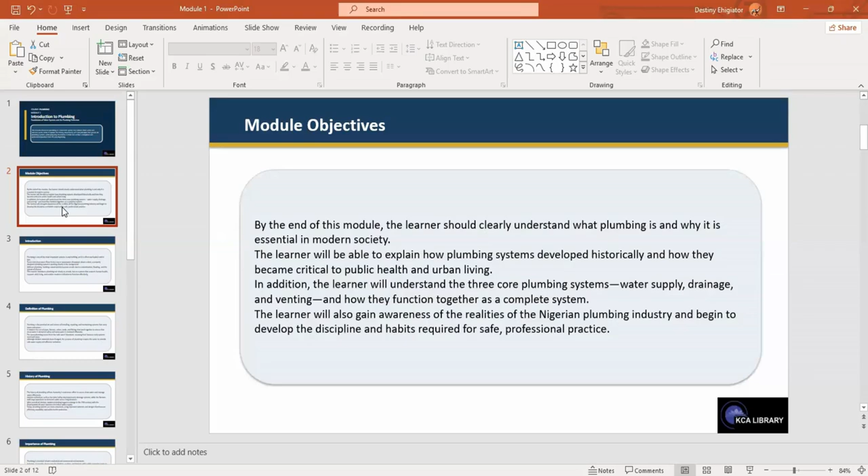By way of introduction, plumbing is one of the most important systems in any building, yet it is often overlooked until it fails. Every time clean water flows from a tap or wastewater disappears down a drain, a properly designed plumbing system is working silently in the background. Without plumbing, buildings would quickly become unsafe due to contamination, flooding, and spread of disease. This module introduces plumbing not simply as a trade, but as a system that protects human health, supports daily living, and enables modern civilization to function effectively.

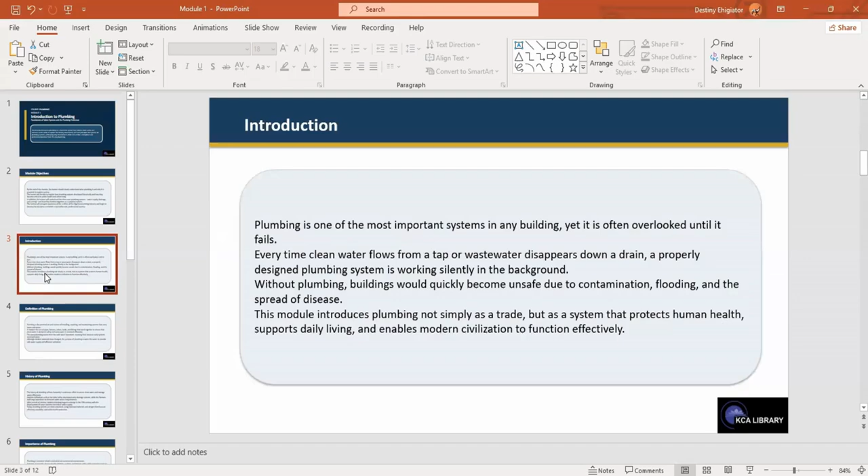Now let's look at the definition of plumbing. Plumbing is the practical art and science of installing, repairing, and maintaining systems that carry water and waste. It involves the use of pipes, fixtures, valves, tanks, and fittings that work together to ensure that clean water is delivered safely and wastewater is removed efficiently. The word plumbing comes from the Latin word plumbum, meaning lead, because early systems used lead pipes. Although modern materials have changed, the purpose of plumbing remains the same, which is to provide safe water supplies and effective sanitation.

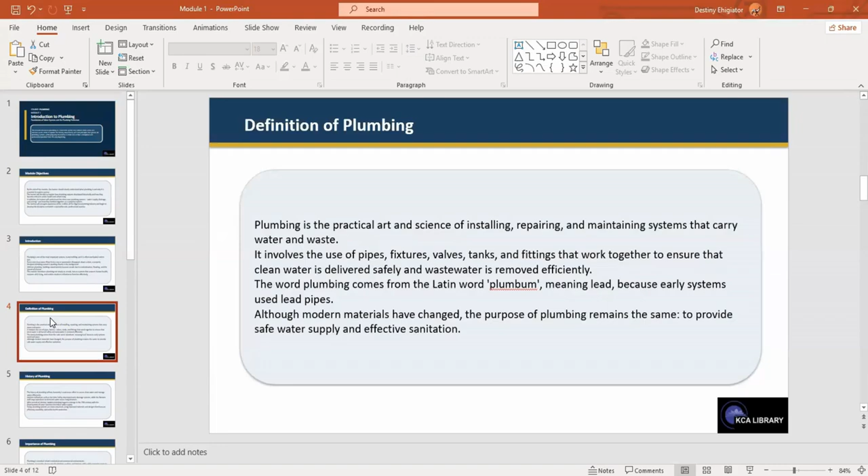Let's look at the history of plumbing. The history of plumbing reflects humanity's continuous efforts to access clean water and manage waste effectively. Ancient civilizations such as the Indus Valley developed early drainage systems, while the Romans built large aqueducts to transport water across long distances. After periods of decline, modern plumbing began to emerge in the 19th century with the development of sewer systems and indoor water supply. Today, plumbing systems are more advanced, using improved materials and designs that focus on efficiency, durability, and public health protection.

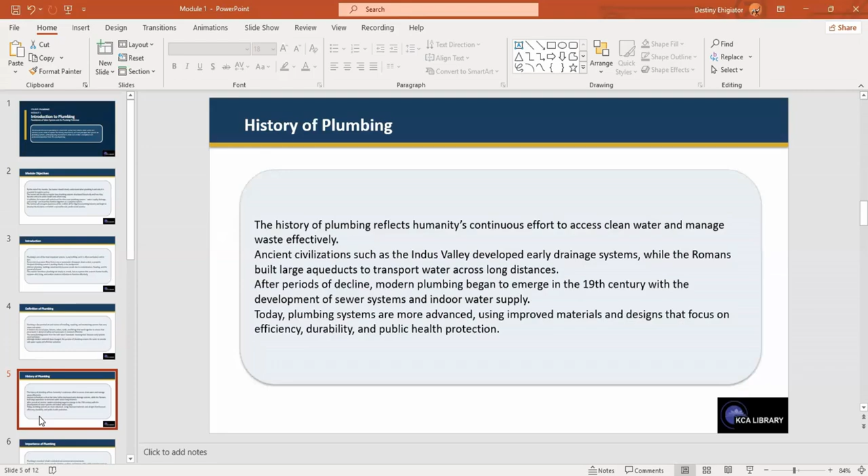Let's look at the importance of plumbing. Why is plumbing important? Plumbing is essential in both residential and commercial environments. In homes, it provides clean water for drinking, cooking, and hygiene, while safely removing waste to prevent disease. In commercial buildings such as hospitals, hotels, and factories, plumbing systems are more complex and critical to operations. A failure in plumbing can lead to contamination, structural damage, and significant economic loss, making it one of the most important building systems.

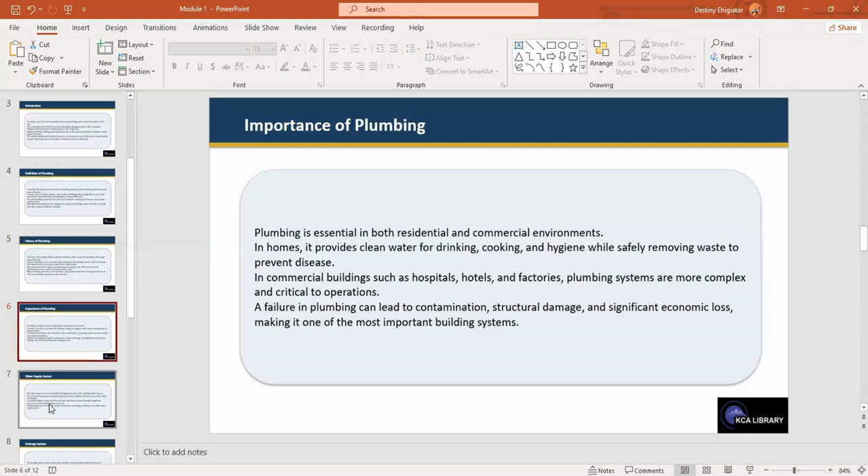Let's look at a very important term, the water supply system, one of the three core plumbing systems. The water supply system is responsible for bringing clean water into a building under pressure. This pressure allows water to travel through pipes and reach different fixtures such as sinks, toilets, and showers. A properly designed supply system ensures that water flows consistently without significant pressure loss when multiple fixtures are in use. Understanding pressure and pipe sizing is essential for maintaining an efficient and reliable water supply system.

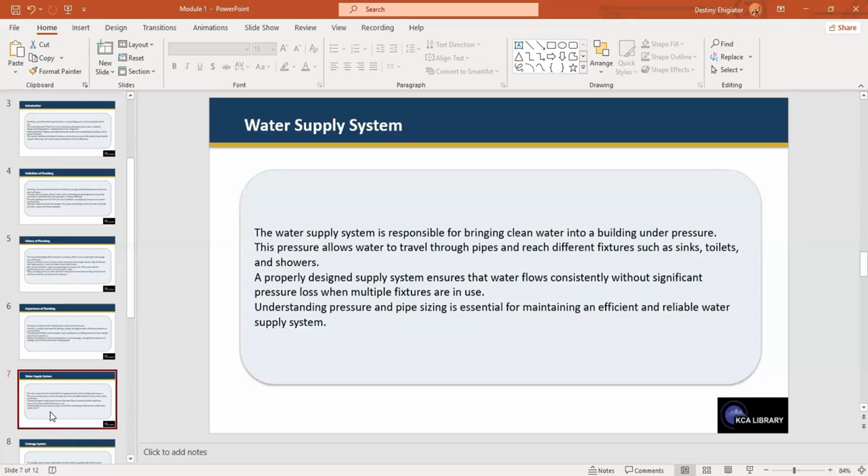Let's look at the next, which is the drainage system. The drainage system removes wastewater and relies entirely on gravity rather than pressure. The pipes are installed at a slope to allow water and waste to flow naturally towards the sewer or the septic system. Each fixture includes traps that hold water and prevent sewer gases from entering the building. Proper drainage design ensures that waste is carried quickly without blockages or backflow problems.

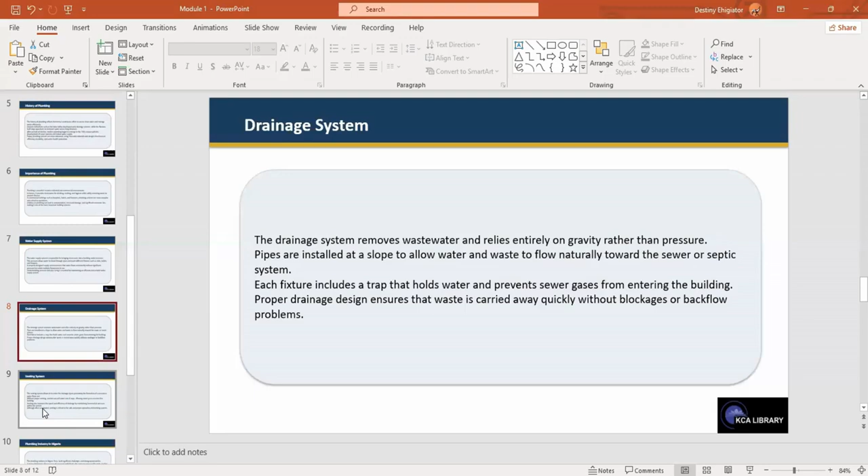The venting system is the next. The venting system allows air to enter the drainage pipe, preventing the formation of a vacuum as the water flows out. Without proper venting, suction pulls water out of traps, allowing sewer gases to enter into the building. So you see why the venting system is important. Venting also improves the speed and efficiency of drainage by maintaining balanced air pressure within the system. Although often overlooked, venting is critical to the safe and proper operation of plumbing systems.

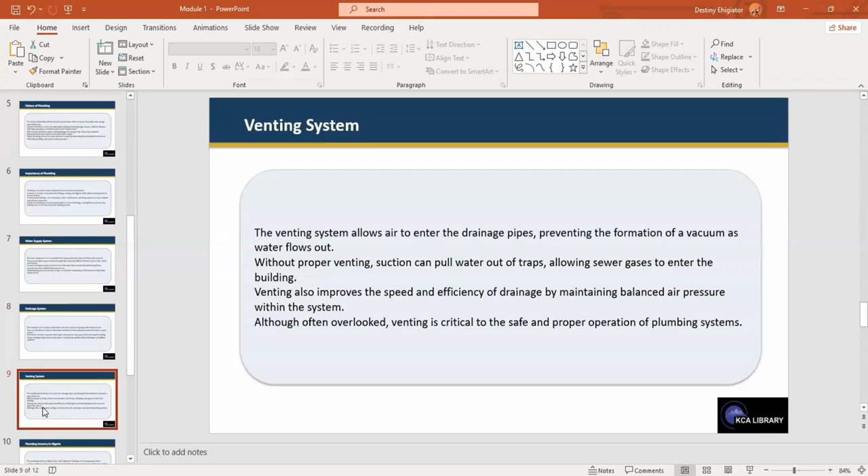How is the plumbing industry in Nigeria? The plumbing industry in Nigeria faces significant challenges and strong opportunities. A major challenge here is the presence of untrained individuals who carry out poor quality work, leading to repeated failures and safety risks. However, rapid urbanization and population growth have created a high demand for skilled and knowledgeable plumbers. Those who invest in proper training and maintain professional standards can build successful and respected careers in this growing field.

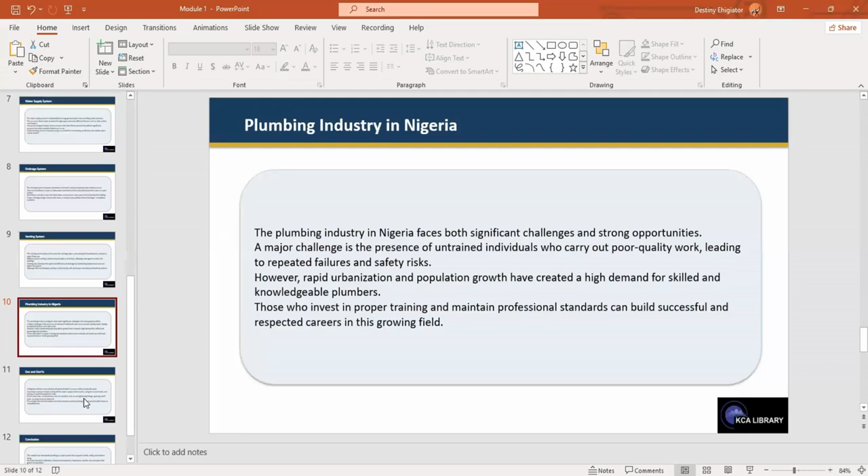What are some of the do's and don'ts in plumbing? A plumber must develop disciplined habits to ensure safety and quality work. Some of the important practices, which are the do's, include turning off the water supply before you repair, using the correct tools, and testing all work thoroughly for leaks. At the same time, certain actions must be avoided, which are the don'ts, such as over-tightening fittings, ignoring small leaks, or using incorrect materials. These habits form the foundations of professionalism and help to distinguish a trained plumber from an unqualified one.

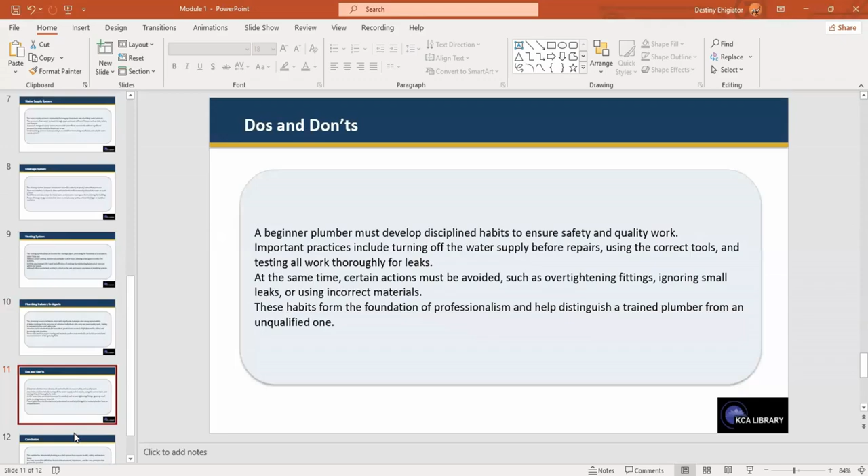By way of conclusion, this module has introduced plumbing as a vital system that supports health, safety, and modern living. You have learned its definition, its historical development, its importance, and the three core principles that govern its operations. You have also gained insight into the Nigerian plumbing industry and the importance of professionalism in the trade. With this strong foundation, you are now prepared to move into practical learning and develop the technical skills required for plumbing work.

So that will be all for module one. I will be going deeper in module two. Stay tuned.

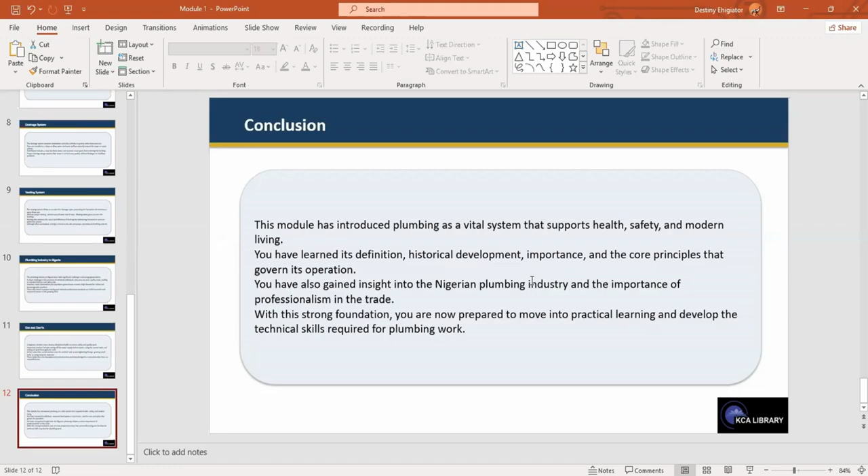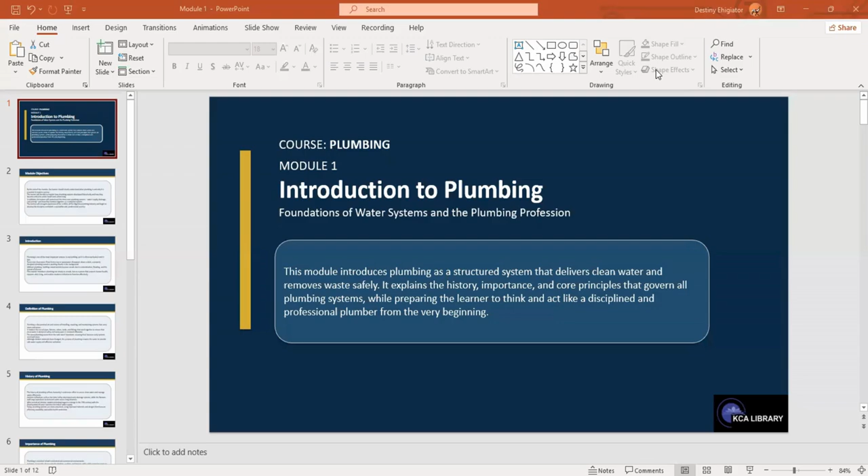Welcome to this course, plumbing. We're looking at module one today, introduction to plumbing. We're looking at foundations of water systems, the plumbing profession. This module introduces plumbing as a structured system that delivers clean water and removes waste safely. It explains the history, importance, and core principles that govern all plumbing systems, while preparing the learner to think and act like a disciplined and professional plumber from the very beginning.